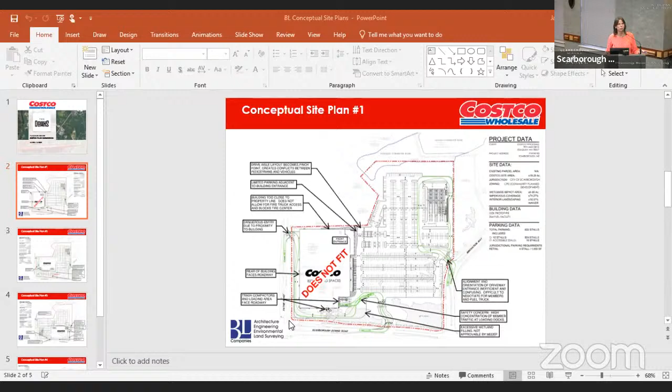So if you could go to sketch plan 2. With this plan, we looked at, okay, can we turn the building, and how would that work if we still had it on the corner? One of the main problems with this layout was the entrance off of Scarborough Downs Road. We couldn't get a safe entrance. If you look at that entrance, it's right by the front of the building.

We have the front of the building labeled. Oh, did I just go to... I did that, trying to make it a little bigger for everyone. But now can you go back to sketch plan 2? Just trying to see if I'm paying attention.

So what this does is it eliminates where it says dangerous — the big red 'dangerous' at the bottom. That is not a good movement to have; that's right by the front of the door, where the majority of the traffic is coming in. This time the loading and the compactors are along Payne Road, which isn't very aesthetically pleasing. And we don't have a good enough parking field by the entrance — we like to have a circle of parking with a lot of parking around the entrance.

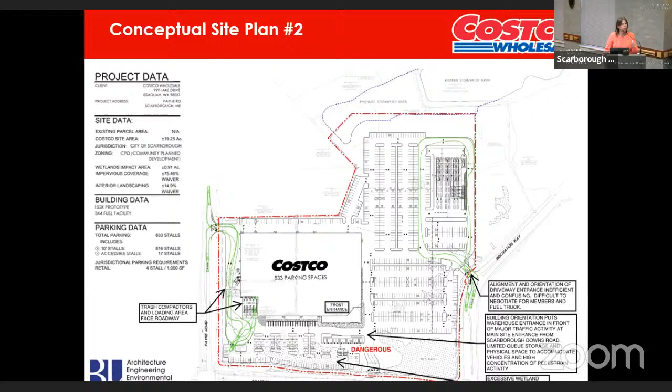And here we have even more wetlands fill — just under an acre of wetlands fill along Scarborough Downs Road. So we're basically eliminating that front parking field, that wooded area right now in the wetland system. This would be very hard to get approved by Maine DEP and the Corps. This one also had plenty of parking spaces, but it didn't yet meet the interior landscaping requirement.

So then we went on to a third sketch. What would it look like if we repositioned the building? We're kind of working around the site — if we move it further over onto Scarborough Downs Road and Innovation Way. Here, the main entrance on Scarborough Downs Road is not in the same spot as that existing curb cut. This would have to be a right-in, right-out access, which wouldn't be safe from a traffic standpoint.

And also, we are now filling in 1.5 acres of wetlands, and we've basically eliminated that whole buffer along Scarborough Downs. The loading area up on the page, right off of Innovation Way, is in conflict with the only full-access driveway on this plan — so there would be potentially truck movements there along with full-access cars coming in. And the gas station is on the hard corner, which we didn't think was aesthetically pleasing in an ideal situation.

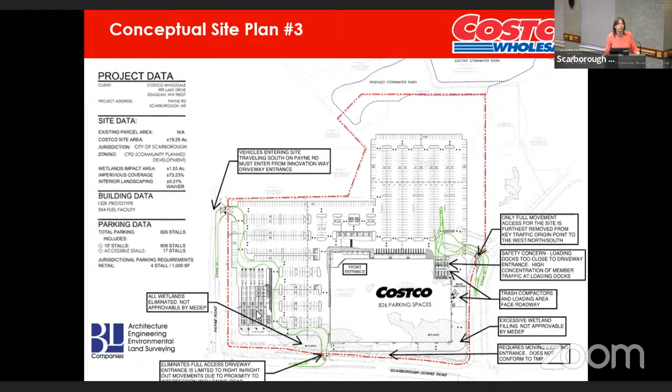Now we can go to the fourth plan. We said, well, what if we turn the building and tuck it up further along Innovation Way? This is the least invasive with the wetlands fill, and we hold the access point that's there. This provides a nice buffer, a treed buffer along Innovation Way.

We've moved the gas station up along Payne. This gives us the most queuing space for the gas station, and we're also allowed a 22-foot buffer in front of the gas station along Payne Road. We have more of a buffer in that area for screening, and all the loading is hidden and covered in the back.

Access for trucks is clean and easy. They come in off of Innovation Way and go right around the back of the building. There's less conflict with the members coming in and out of the site. This just seemed to fit the best and make the most sense.

We preserve the most wetlands and meet the interior landscaping requirement. That's how we got from the building against Payne Road to where the building is now. There were probably about 22 plans of different tweaks and iterations of these basic concepts, but these were the 4 basic concepts we looked at.

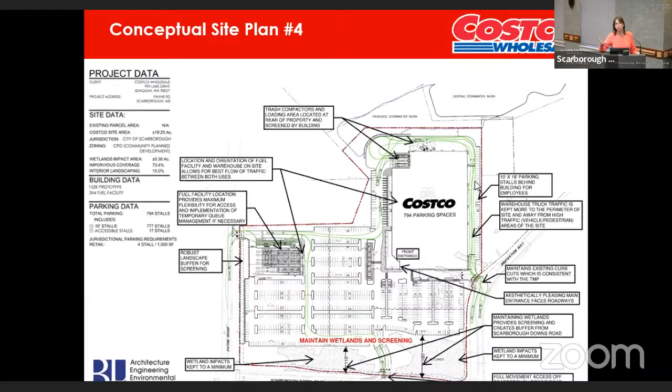I'd also like to note that on concept plan 4, we made the parking spaces behind the building 10 feet wide by 18 feet deep, since these would be more for employees and less likely to be used by customers. So we decreased the depth by 2 feet.

Do you have any questions about the methodology? Would you like me to have Chris come up now and walk through the number of parking spaces? Let's finish up with your presentation and then public comment, and then you can stand back up and the board will ask questions. I think that works best.

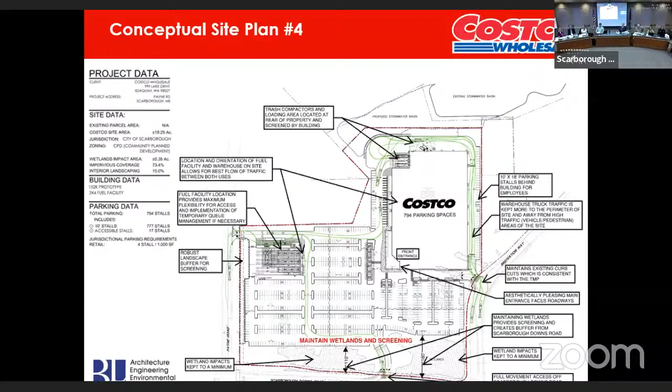Good evening, everybody. Chris Teasler with Kittelson and Associates, the applicant's traffic engineer. So you've obviously received the memo. I believe it's in your packet, which we prepared after working with staff to identify a little bit more documentation and information regarding parking for this site.

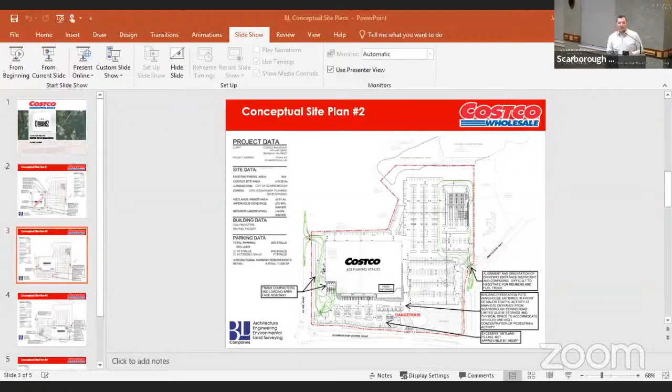I'll give a quick high-level overview of the 2 main points. The first was looking at the number of parking spaces and what Costco is typically trying to achieve, and what we've seen for sites in similar markets, similar sizes, and similar building sizes as it compares to what the town code would otherwise stipulate.

As we looked at those similar scale locations, what we're seeking here with the 794 stalls is basically a parking ratio of 4.93 per 1,000 square feet. That turns out to be right in the middle of the average of what we've seen at 10 or 12 other locations we pulled from our database. So certainly not the most intensively parked, and not the least, but that number is also important based on the market.

We want to make sure we have enough parking on this site to adequately serve Costco members and the anticipated demands we would see. Which brings me to the second point, looking at parking utilization for Costcos as a whole throughout an entire year, and the typical target ranges that both Costco looks for and industry best practice tells us to seek.

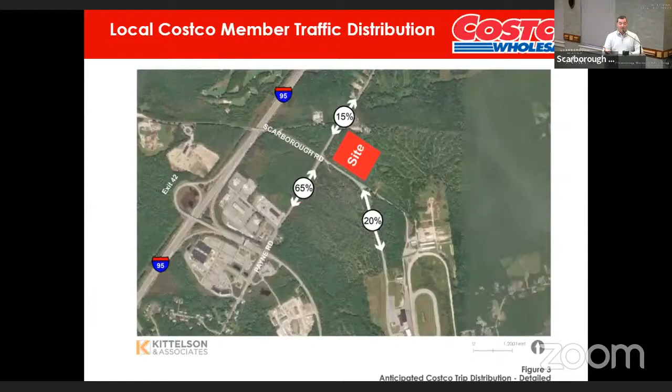I guess that's the other thing I can touch on, is the size of the parking spaces. Is that important? I knew there was one more thing. So when we think about the size, Costco does typically try to get 10-foot parking spaces wherever possible.

There's a few reasons for that. One is efficiency and safety and comfort for their members. Costco carts are actually much larger than your standard grocery store shopping cart. Obviously, they cater in bulk goods and larger items, so naturally those things are a little bit bigger.

Having more space between the vehicles allows members not only to get more out of the travel way and the drive aisles when they're loading their cars, potentially even getting the shopping cart completely out of the way. It also allows for those larger vehicles that people tend to bring to Costco, because they know they're going to be buying a more substantial amount of goods and merchandise, to load them up safely and effectively.

And the nature of the car that they choose to bring is oftentimes the larger one. Some people have a small car at home and then their big SUV or the family truckster. They bring the family truckster to Costco, not the smaller car typically. So that's really the impetus behind that.

As Michelle mentioned, there are several spots along the perimeter of the building where they have shrunk the size somewhat, again trying to be reactive and responsive to your code. And also thinking about where employees are most likely to park, away from the prime parking area where Costco members are most likely to park in proximity to the front door.

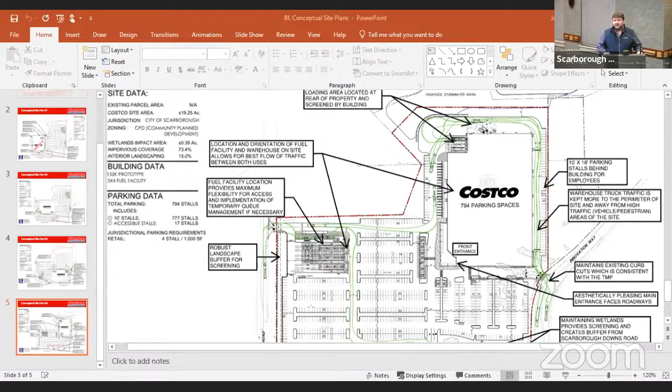So, which would you like me to go over first? Well...

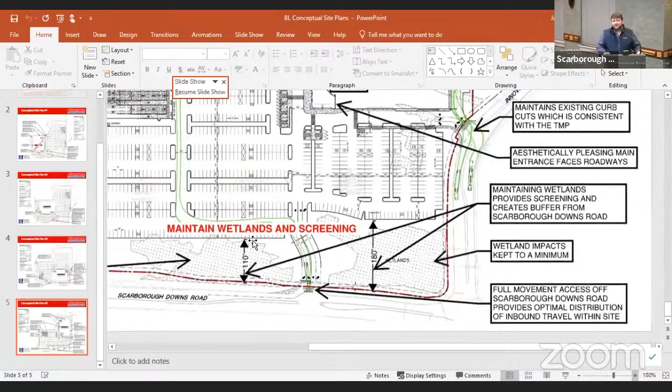I think if you could talk about the fueling, like I know you're queuing up a couple of lanes here. Can you pull it so you can see - yeah, right there, that's perfect. Nope, go up. So our canopy is actually further to the right in this site plan.

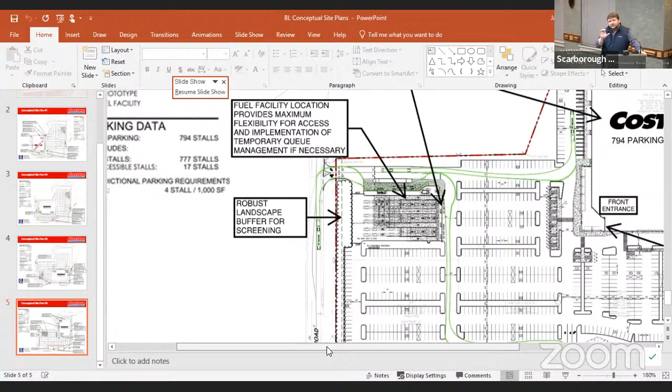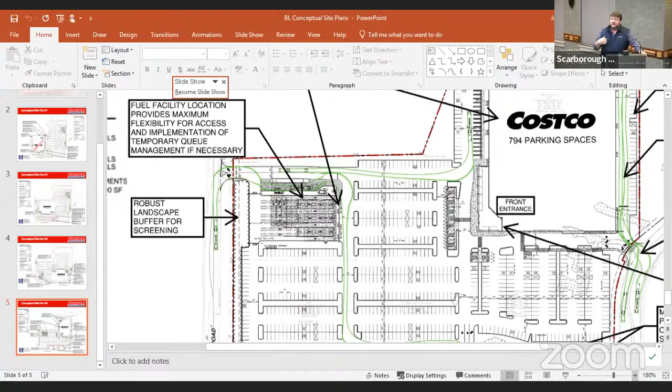We actually have an immense amount of data as to how our gas stations work. The Sam's Club up here doesn't have as much queuing as we actually have here in this layout. And what you're talking about is a scenario where there's a situation that's happened and gas prices have gone through the roof, and now people are really trying to do that.

I wouldn't ever deny that we don't have traffic issues that have evolved over the years. We've gone through situations where we've had traffic blocking, but that's what's caused us to evolve and figure out in extreme detail how these all work.

So several things are key. One is we're single direction, so that way people can't just sort of free go in different directions. We have a member that comes in and can guide people. The vehicles can fill from either side of the car - you can fill a big F-350 from the opposite side of the tank because we have longer hoses that accommodate both. So there's no issue as far as the vehicles we provide fuel for having the ability to fuel from either side.

As I mentioned in the last one, we have an average fill time of 3.5 to 4 minutes. It's much faster than the average gas station, so people really do figure out how to get in and get through.

So that creates a lot more - our gas station drive lanes are purposely wide enough to be safe, but then we also have a through lane between the pumps. So you have two cars that can load on either side filling up, and then you have a center lane so that allows anybody within it to actually get out very safely.

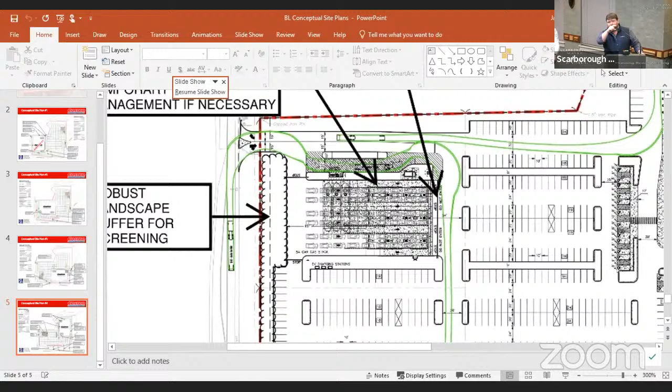I forget the exact data, but in this one we show 3 islands by 4 deep. If I was to add a 4th island, we'd increase our throughput by about 20%. And I can tell you in places in California where we're extremely busy, we're doing 5 by 5s now - they're much larger and putting through a lot more people.

But separate from that, let's say we are in a situation where the gas station is full - we just got people coming in and it's backed up. So what we do is we have a plan for that. That entrance down at the bottom gets shut off because we don't want people backing up and blocking that entrance and then backing onto Payne Road.

What they would end up doing is coming in - we have several different layouts that we would work out, and we typically do this when we get our warehouse manager selected. We have options for them to come into the parking lot and be able to stage within the parking lot. But when we're doing that, we're really staging a lot of people, and that does not happen on a regular basis if we've planned for it.

So what you're seeing when you go out recently - I can actually attest to the fact that our gas stations around the country, around here and in Canada, are all busier because of the current situation. And like you said before, we shouldn't necessarily be designing for the absolute worst case, the Wednesday before Thanksgiving kind of situation. So I can appreciate that.

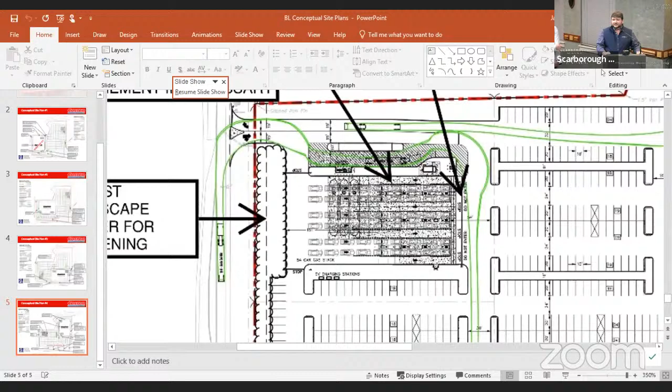I'm actually the one that asked about the parking utilization. I appreciate you providing that information. It's the first time I recall being on the board where we've received information like that from any applicant, so I may be mistaken.

Regarding, just to piggyback on the fuel thing, I just wanted clarification — you basically will have people coming in off of Payne Road, right? For the fuel station, they can access it from either side. They can come in off Payne Road or from the parking lot. But if they're just coming for fuel, most likely it's going to come off Payne Road.

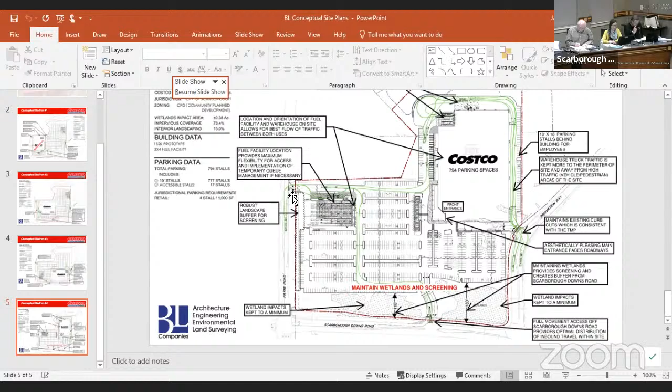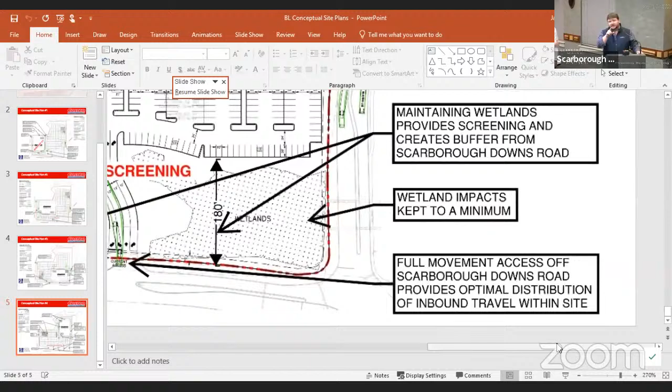Yeah, so they would come off and make a sharp right there. How many fuel stations do you have in each of those 3 aisles, do you know offhand? It's 4 deep, and there's one on either side. So it's a 4x3 layout. And is there enough width between those so that if a car is behind another one getting fueled up, they can pull out? Correct, yeah.

Based on normal circumstances — and I understand what we're going through now is kind of unique, you can't plan your business based on what's not normal — based on your experience with your other facilities, will this be adequate queuing? Yes, it's actually a little bit more than some of our other locations.

So what happens when cars come in off of Payne Road, take a sharp right, and all of a sudden there's a car there? Our attendants are going to be paying attention to that. So if, for example, that top lane starts to back up and the others are not, they're going to direct people to get into the further ones to fill up all the different lanes. If all those lanes start to fill up and you get queuing, they're going to pull out the cones, block that off, and direct people to go down through the parking lot instead. Exactly.

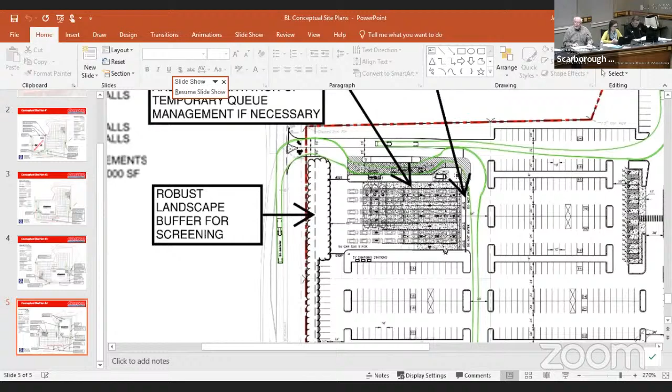Regarding the sketches on the siting of the building, I'm comfortable with where you have it, your preferred place, because this is a very high profile location, and there's going to be a lot of parking — you can't get around it, it requires a lot of parking. I think it's really incumbent upon you folks to have some nice landscaping around the parking, even within the parking, the islands and things like that. I think that would be very important.

I wanted to ask about the typical drive aisle widths at your other locations. What are they typically? 25. Are they 25? Why are you going to 24 instead of 25? We call them our development guidelines — we go with either one. It gives us a little bit of flexibility to deal with items that come up, such as the parking depths. So if I can reduce the drive aisle by 1 foot, then I can keep the 10 by 20 parking space.

Okay, I actually understand your rationale for the space between the vehicle parking spaces and the oversized parking spaces. I think it's kind of interesting, the comments about other big box stores going with a similar arrangement. And I think our standards are probably based on... have our standards changed to accommodate these big box stores like this?

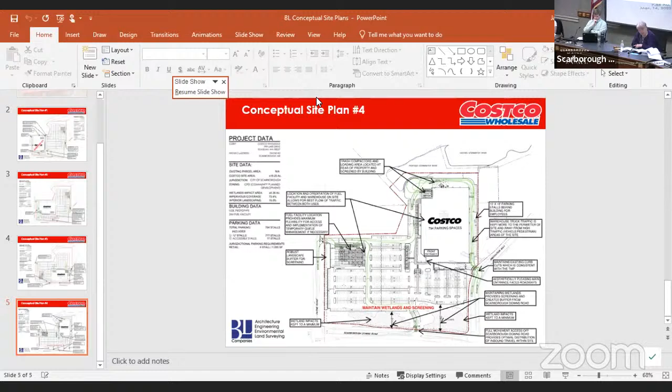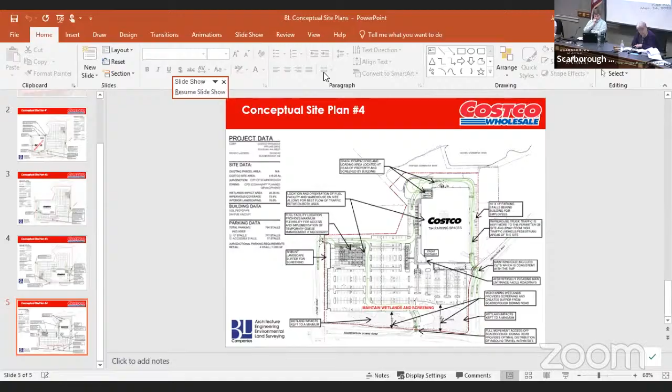If you've got the gas station in front, we need to see robust landscaping. Given the amount of parking that you have lined up in front of Payne Road, if that's going to stay there, we need to see robust landscaping.

You don't hear the complaints and concerns from Scarborough residents about parking lots that are just loaded with asphalt. You don't get those phone calls. Jay gets them, Eric gets them. I hear them from folks on the street. And we do pay attention to that. We do pay attention to how a business looks in Scarborough, and how it looks affects how it is received by the people of Scarborough.

You could end up putting a building in there that everybody complains about, and that hurts your reputation. So please work with the staff, please work with us in terms of getting a site plan that really meets the needs of Scarborough and meets the needs of Costco. I think it's possible, but I think there are going to have to be some very tough discussions with the planning staff. I appreciate the work all of you have done in bringing this to us, and I do look forward to getting a membership in Costco again, and to welcoming you. Thank you very much for your time.

Could I just make a comment? I'm a little troubled because I didn't get a sense that there's a real problem with parking that you expressed. I think it's very important that the public get a sense of where we stand, because Jen and I did differ a little bit, but I didn't get a sense that there's a big problem with this. So I don't know how you want to handle this, but I don't like it being left hanging out there like that. I was expressing my opinion, Roger.

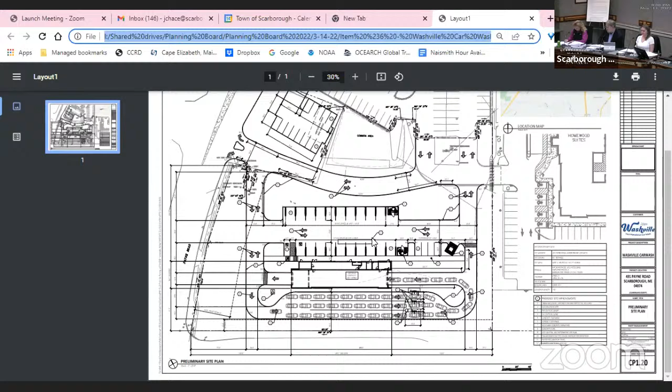Yeah, very similar thoughts here. I'm certainly concerned with the Payne Road approach. Also, what are the hours of operation here? We would be operating from 7:30 to 7:30 generally, and on Sundays 8 to 5. I'm just noticing the nighttime renderings and curious there. All of our lighting would be dark sky compliant, naturally, it's just how we design our building. Also curious about signage and wayfinding on the site here. So, cool with that.

Let me talk about Payne Road, understanding how people work. Once there's that entrance or opportunity to enter, that's where folks are going to enter to get to Sebago Brewing, who are coming from Payne Road. They're not going to go up to Southborough Road and turn, they're going to take that opportunity. So the traffic we'd see going into that site from Payne Road heading north would be, I think, reasonably a fair amount more than just people coming to the car wash. In the standards, we indicate that where there are two possible entrances to a site, the entrance should be on the road with the least amount of traffic.

That's Southborough Road, which is already signalized, so I don't see the need for the Payne Road access. I understand why folks might want it, but we have a perfectly good entrance and exit out to signalized traffic on a road that can handle the extra traffic from this site. If there is no entrance or exit off of Payne Road, then there's no need for that amount of space to be used for a passageway, which would allow room for the car wash to be built parallel to Payne Road rather than at 90 degrees. That would also allow the opportunity, I suspect, for the option for the vacuum areas to be in the back of the building.

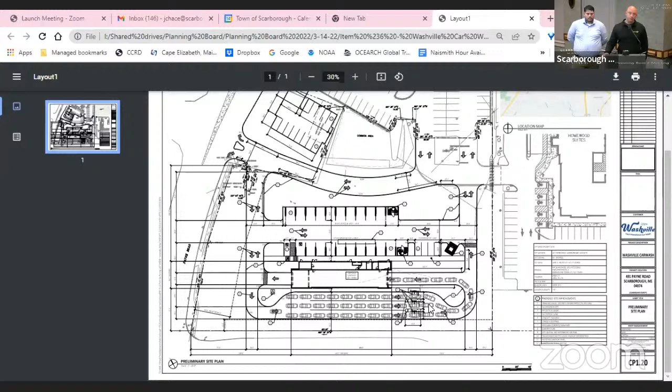Certainly when you do a regular site plan, that sort of information is very helpful. As we look at that, knowing what steps you're taking to mitigate some questions or issues we have, if technology is the answer, give us the technology. Understood, and that's very helpful to us.

Nobody has brought up yet the question of the architecture. We've talked about the garage door facing the street, which is not recommended certainly in the design standards, but nobody has talked about the actual view of the building.

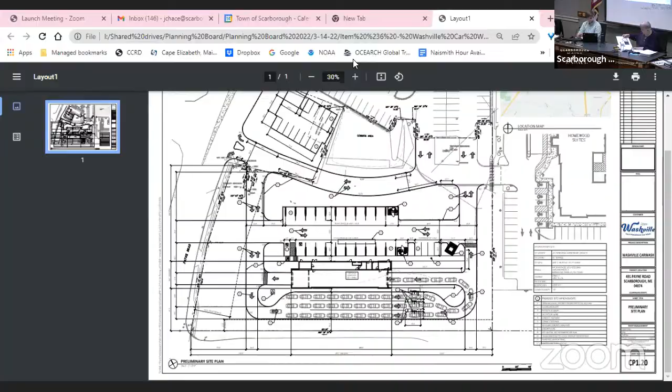And as I look at it, what I am not clear that I see is a relationship between that building and the building next to it, to Sebago, let's say, or La-Z-Boy, because it's all of a sudden it's a new building in between two others, and it has very distinct architecture all on its own.

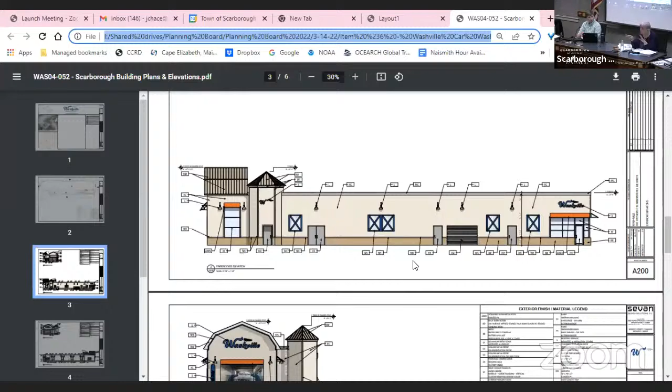And we do like to pay attention to the abutters and the relationship of a new building to the abutters in terms of the architecture. So I really would urge you to take a look at the other buildings that would be next to it and consider what you can do to kind of harmonize this new building with what's there.

Keep in mind the New England vernacular as you go along and the design standards that we have. We do have commercial design standards. Double check those.

I don't recall seeing essentially a sort of a barn visual coming to us before, so I'm not sure how I feel about it. It's something that's kind of different.

We build all over New England and in Long Island, and one of my comments back to that is almost every town in New England does have a barn. So the gambrel roof is an extremely popular roofline structure. The silo structure is something we try to do to mitigate on height, but also set the building apart, and it's part of our brand.

To be quite honest with the board, this is our brand. We won't mitigate or change our brand to meet design standards. We feel that they fall within line.

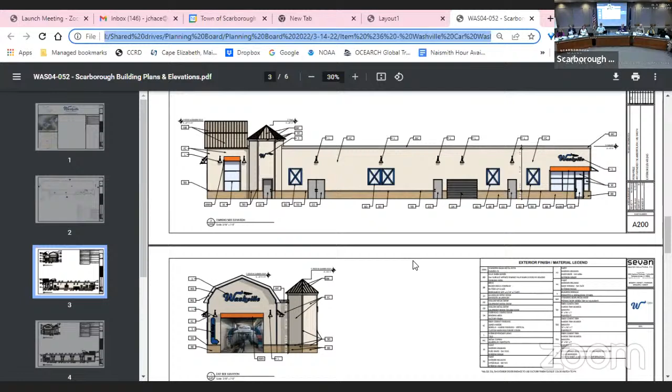Next on the agenda, Mayetta Construction requests a final land reclamation review for a wetland restoration project as part of an approved EPA mitigation plan at 150 Pleasant Hill Road, assessors map R078, lot 50A.

Eric: Mayetta Construction is requesting a final land reclamation review for site work in accordance with a Maine DEP and EPA approved work plan. This would consist of restoration and stabilization measures for 4 wetland areas on the property. Work outside of these areas would involve fill removal, grading, and installation of stormwater facilities. No further development is proposed on site at this time.

At the preliminary review meeting in January, the applicant was asked to provide further stormwater information and zoning detail on the site plan, which has been clarified. With that in mind, staff has prepared a draft motion for the planning board's review. I'll turn it back to you, Madam Chair.

Thank you. And for the applicant. Good evening, I'm Amy Bell Siegel from Sebago Technics, here with Vinny Mayetta from Mayetta Construction.

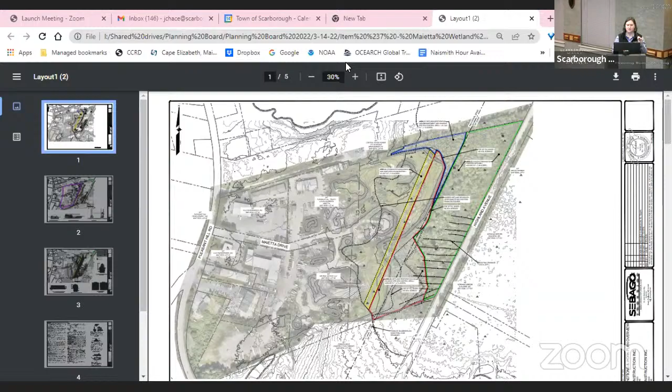Thank you. This item is subject to public comment. Is there anybody in the room who's going to charge forward with a public comment? Jay, is there anyone online?

We have a few folks online, 4 folks. I will start a countdown to give them a few seconds to raise their hand.

And none have raised their hand. All right, in that case, the public comment period is over. I will turn this over to the board in general.

Hearing none, I have a draft motion. I move to approve the project titled Mayetta Wetland Restoration and Planting proposed by Mayetta Construction as depicted on the plan set prepared by Sebago Technics dated 2/28/22, with the following findings and conditions. Findings: the proposed project takes corrective measures for unpermitted activity on the site. These measures include restoration and stabilization within several project areas as part of a consent decree with Maine DEP and the EPA. Work outside of these 4 areas will consist of fill removal, grading, and the installation of a wet pond stormwater BMP. No further development is proposed on the site at this time. Waivers, number 1, permit the appropriately stabilized steep slopes on site to be greater than a 2-to-1 ratio as authorized by state and federal agencies.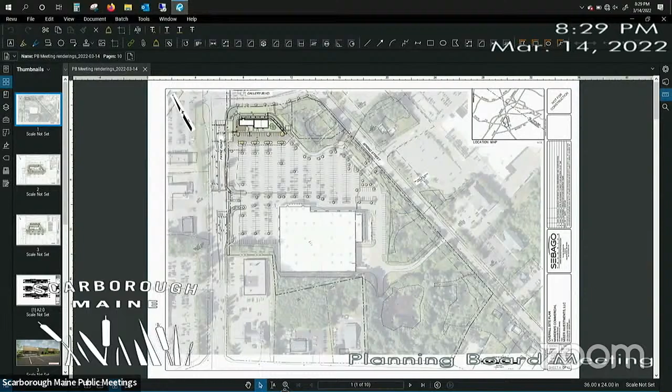As Eric briefly stated, the proposed project will be about a 5,000 square foot building with 3 tenant spaces, one of which for a drive-through coffee shop, located on the corner of Gallery Boulevard and Payne Road in Scarborough. It's located on the northern side of the parking lot, near that intersection of Gallery and Payne Road. It's currently accessed from two locations, one at Spring Street and one along Payne Road there, the Martin's entrance. Payne Road of which is signalized currently.

There are sidewalk connections, if I could zoom in here. Sidewalk connections proposed as part of the site plan application along Gallery Boulevard, as well as a connection to Payne Road for pedestrian access from either direction there.

Currently today, you know the site as that large open and underutilized corner of the parking lot. The project itself is taking that parking lot and proposing about a 13,000 square foot reduction in the impervious surfaces in this corner of the parking lot. And those reductions come in the form of landscaping for the building, larger landscape islands towards the end of the parking lot, as well as an enhanced planting screen along Gallery Boulevard.

The screen certainly will be designed to include year-round 4 seasons of interest, provide some buffering to the building itself, as well as the aesthetic value.

The project is currently proposing this building along the edges, as close as feasible to the setbacks at the corners along Gallery Boulevard and Payne Road. The goal is to use the building to minimize the visual impacts of the parking lot. As part of the commercial design standards, we're trying to get that building close to that corner, while still allowing for access lanes and drive-through lanes around the building.

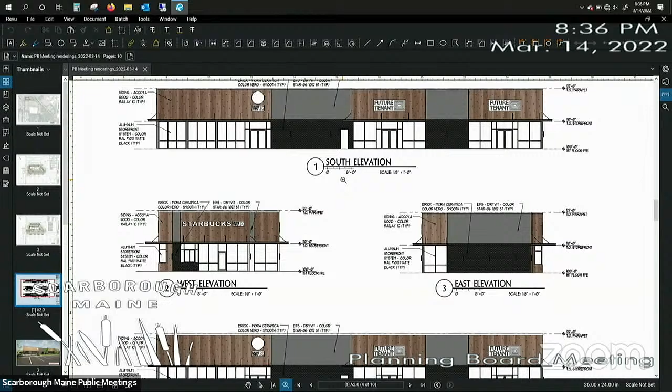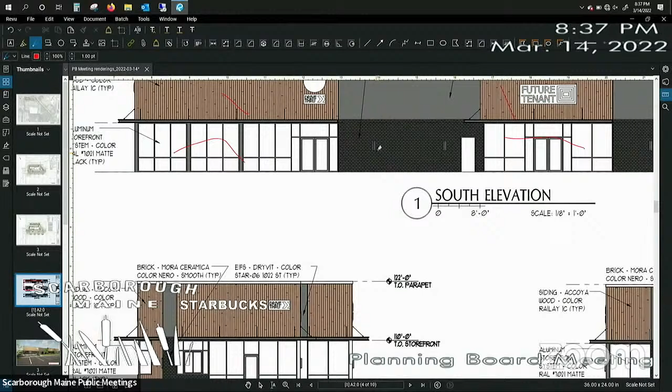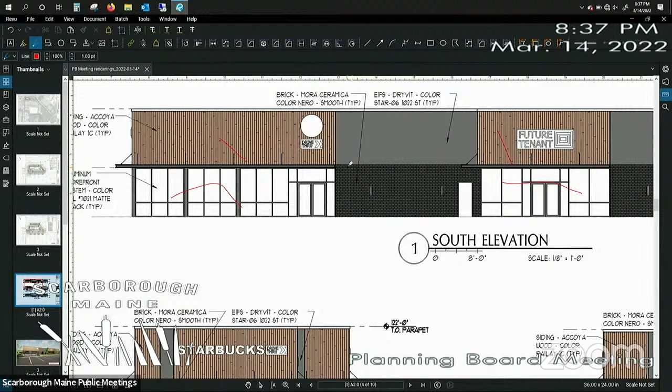Currently, the proposal is to have wood siding on top, with the majority of the entrance areas to each space in glass, and the top in wood. The bottom half is currently proposed to be brick that is painted black. The top portion is an engineered synthetic smooth finish stucco that's been used in multiple locations, which they're currently looking to use—a smooth finish as opposed to rough. So you have brick, then a smooth exterior wall adjacent to the wood trim and the glass windows.

If I could go through a couple of the architectural renderings of the site—I'll note these renderings are representative of the current building, but not necessarily the current site layout. You'll see some inconsistencies, like no landscaping shown in some areas where the landscape plan does show landscaping.

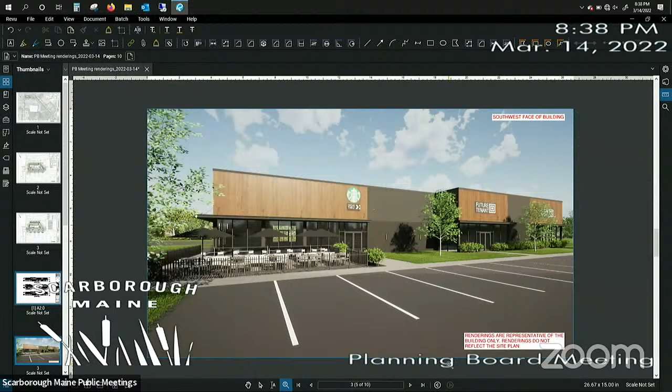Here we're facing the southwest face of the building, the entrance to the drive-through coffee shop with the patio, and to the right, the potential future tenant spaces. Here's the southeast face of the building, you're seeing the other side of the front, showing the interior of the parking lot.

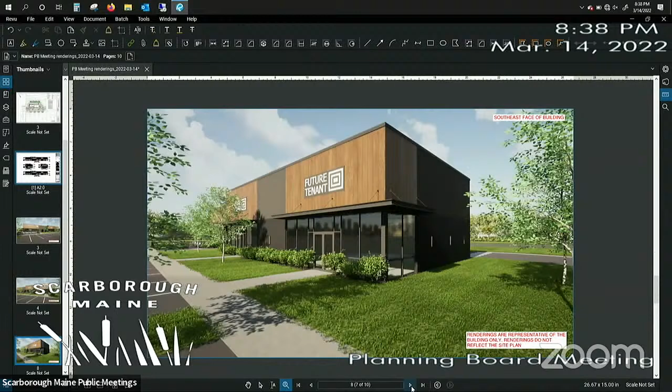As we round the corner, to the right is the drive-through queuing lane. On the back side of the building you can again see the wood trim, brick lower half, and smooth finish at the top, with the drive-through window at the very end. Here we're wrapping the northwest face of the building.

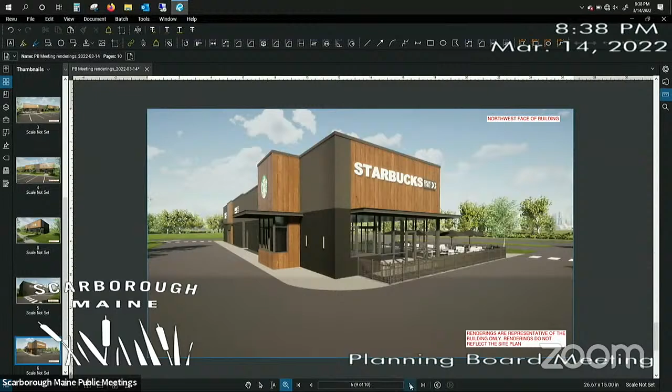You'll see the drive-through window and the walk-up window for pedestrians connected to that patio. Here's a better view, with the walk-up window to the far left of that face of the building, an access door, and a patio with seating, umbrellas, and other items for pedestrians to sit.

So that's a brief walkthrough of some of the renderings of the building. I did note in the comments that it looks like an existing conditions plan didn't make it into your packets. We'll make sure that's included with any response to comments, as I believe that should help clarify some of the other comments listed from staff.

We'll be coming forth with the fire department turning radius and vehicular movements to make sure a fire truck can make the movements around the building and circulate through the parking lot. I believe we've covered a majority of the comments. We'll be providing a little more information on snow storage and fencing with the coming response to comments. With that, I can turn my presentation over to the board for comment and follow-up. Thank you.

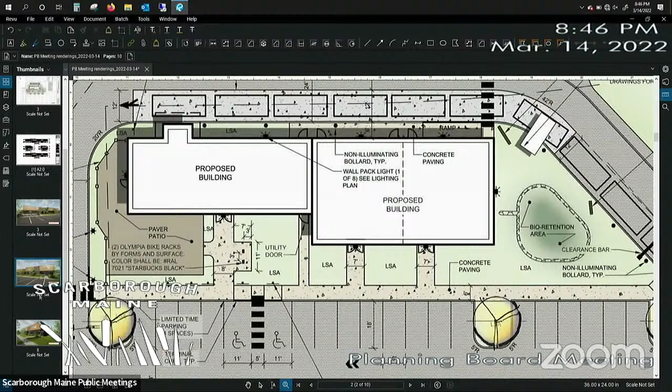There is a photometric plan that was provided as part of the application. Briefly, on the site plan, the building is proposed to be lit with wall packs. I can show you a bit more of a visual of that in the rendering, certainly not from that close up.

Is there coverage for the patio area? Yes, there will be lighting coverage for the patio area, and there will be some ambient light coming off the interior itself. There's also an alternative where there may be some sort of hanging patio style lighting, string lighting.

That's all the questions I have. Thank you. Karen? I don't really have any questions. I feel like they've addressed some of the concerns we have. At this point some of the issues we're dealing with are rather minor. I think no situation will ever be exactly perfect, and I think they've done a really good job using a space that's just sitting there blank, trying to make the best use of it.

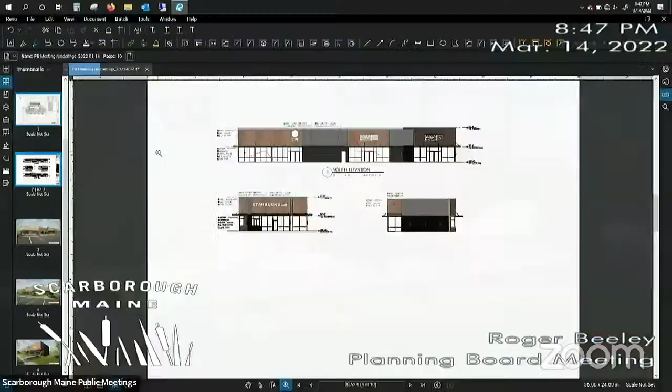Thank you. Roger? First, I wanted to say I think the building looks terrific. It'll be the most attractive building in the whole area right there, I think. Can you go to the screen that shows the side of the building? The side on Gallery Boulevard—not that, the backside—because I think that really looks attractive.

Now, is there anything you can do about that though? Because that looks like one big blank wall. That's a great question. We can certainly look into what that may be, but at the moment I don't know how much can be changed. We can certainly look into breaking it up between the all-black or charcoal, whatever it is, just two different color schemes or something.

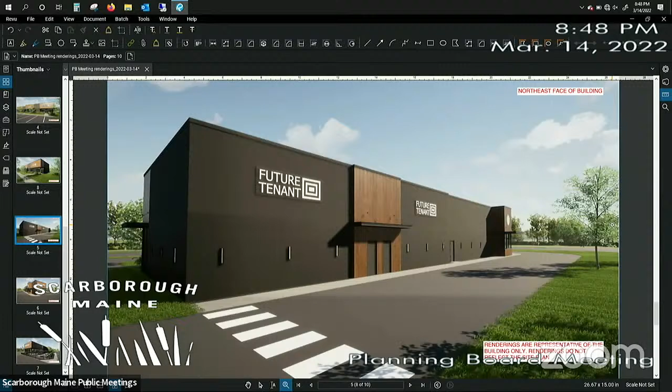I don't have a problem with the drive-through right there. It is what it is, that's where it's got to be. So I think if you could do something, because that's what some people are going to be seeing, that's how most will likely go. As you're talking about the drive-through, I'm amazed at how many people queue up to get a cup of coffee in this town. Being right there, they can decide whether they want to come in or not by looking at that.

But I think the building looks really nice. I want to go back to something at the previous meeting. I thought we had a discussion about that closest access point on Spring Street, and didn't we decide to discourage that? Do you recall? That was a staff comment at the sketch level review.

It really wasn't brought forward during the site plan comments. I didn't really get a sense that staff got a sense that it was something the applicant wanted to pursue, or the board was thinking of requiring. But that was something in our previous comments, and certainly if the board wants to see that, they should have that conversation with the applicant.

Because the one that's further down on Spring Street, that's the one that goes into where Walmart is, is that correct? Yeah, I believe so, the northerly most entrance that was previously discussed. Right, it's a right in, right out, and there's often a lot of vehicles that turn left out of there. Didn't we have that discussion about that? You're probably anxious to jump all over that. So I'll leave that alone then.

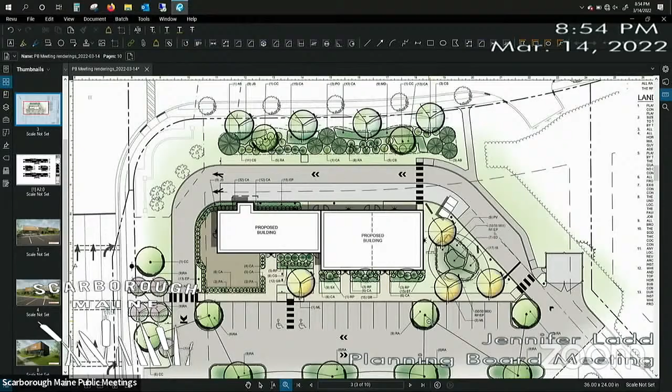Did we see this as part of, was there a larger plan for the site at some point, or am I imagining that? Yeah, at sketch plan we had looked at, or I believe we had shown kind of a larger, what would potentially be future development along the Payne Road side. Okay, is there still a desire or effort happening to move towards that at some point? Certainly, yeah, I know that's still something the applicant and Miser Investments would like to do in the future.

I appreciated the look at the master plan because I think it helps tie this together with the other activity already happening on the site. And I liked some of the changes you were proposing in terms of modifications to the entrance out at the signal on Payne Road. I can't remember if that concept plan included it, but I'd throw out that it would be great to have some sort of pedestrian connection between this new building and the existing building. It probably need not be at every row, but at some point, an option for people to park once and do two things if they wanted.

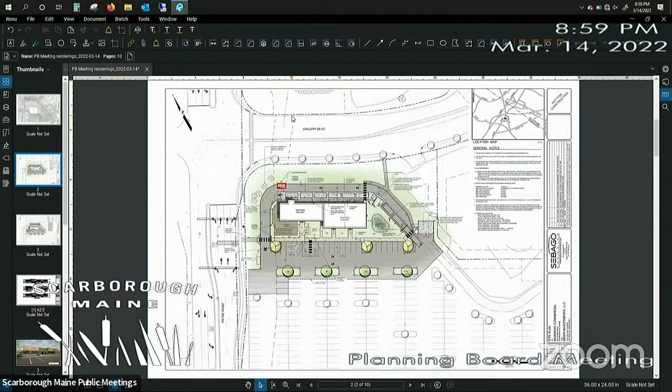When we draw that in what's called a pipe network, I was looking at it after I saw the comment. It does look like it's a proposed pipe. That's certainly just how the line work showed up, and we'll look to show that more as an existing pipe as we can. As a CAD user, I can sympathize with that. Thank you for the comment.

I was just curious how much of Gallery Boulevard you were going to be paving or not paving. So that answers that question. The intent is to try not to impact Gallery Boulevard. Okay, great. And then, let's see, ped connection.

Yeah, I think that's that. Roger brought up the right in, right out on Spring Street, which I do also remember talking about at the last meeting, probably as part of that larger site plan conversation. I see this from both sides. As an applicant, you are arguably not making any other changes at that location. As a planning board member, and in defense of our standards and ordinances, my understanding is that any project like this opens the entire site up to conversation about access management and things like that.

And I guess I would say, if this access, with the addition of these new uses in this corner, continues to present any additional safety concerns or confusion within the parking lot, it's definitely something that I would be looking to see remedied in a future build-out phase of that larger master plan.

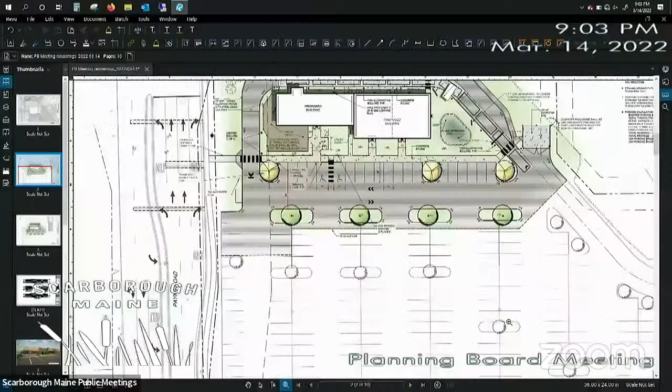Let me see if I can back out a little bit here. They're not actually in the islands per se. The existing light, I can highlight it here for you. The existing light on that side of the parking is right there currently. Yeah, that's probably going to be too far. You can see where your mouse is right now, that's really dark, right up here.

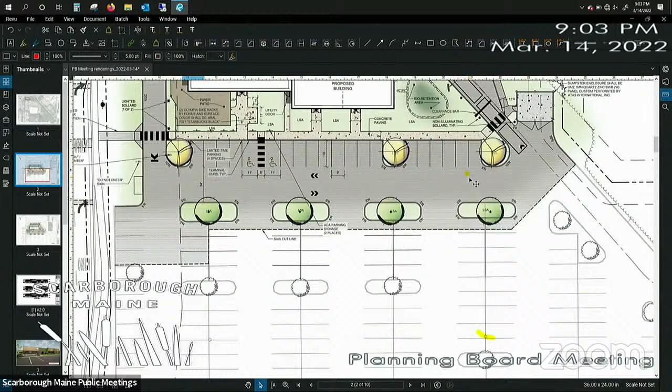That area probably needs maybe a bollard or something like that, that can at least take care of some of that depth perception. I'm just wondering, even in your drive aisle, if you've got people walking across into the bigger parking lot, I'm not worried about abutters in this case, and we don't need full cutoff, but there's nothing there. So I'd like to see what might be done, whether it means you're going to have to put some pole light in those islands to take care of that. That might be necessary.

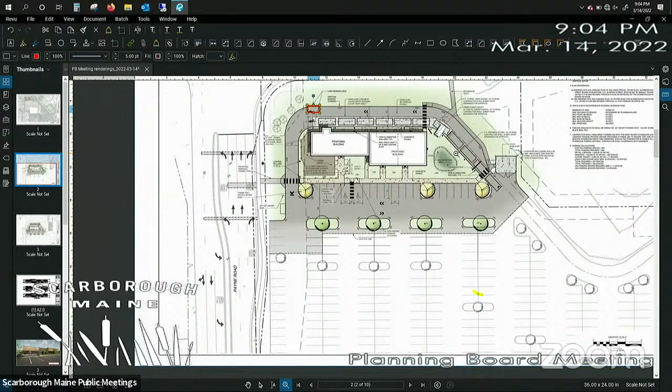I don't like to add a lot of lights, but I also don't want people run over because nobody can see them. Certainly, we'll evaluate that photometric and take a look, and if we find a dark spot there, we'll illuminate it and make that photometric a little bit more balanced. That'd be great, we'll consider that. That's all I have, everything else has been covered.

I have the staff noted a question around the flat roof line and whether they're going to be roof mounted hood systems or HVAC systems. Any HVAC systems that get mounted on the roof shall be screened, and we'll certainly provide any sort of information with any response to comments for you guys. All right, yeah, if you can show how that's going to work, I appreciate that. Certainly.

I've got another question. The walkway off of Gallery Boulevard leads up to two different crosswalks. One of the crosswalks just kind of ends at the building, and I assume it's there for folks to come out the rear doors. But I would suspect that people coming up from walking along Gallery Boulevard will also do that so they can walk around the building to Starbucks. So I think you're going to need to put in a walkway, something that connects that crosswalk to the front of the property.

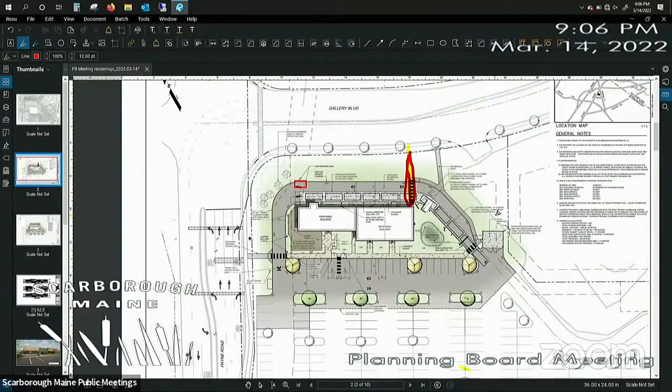If people are coming, the crosswalk and sidewalk are there primarily for the buildings, but people are going to use that to get around to the front. We don't want them deciding to walk down the back along the sidewalk, coming to the ordering area and saying oops, then trying to walk around it. So I think that connection would be important.

I had a question about the patio. Actually, the note was benches, but I think you've explained that they're going to be tables there. Are they going to be year round or removed in the winter? I believe they'll be movable, so they'll have the option to move them around. I can't speak to whether they're going to be pulled in the middle of winter or left out, but I believe they are movable.

I would suggest that it's important to have at least a couple of benches year round. If you've got the tables, that substitutes for the benches, but if they're going to be pulled aside, it would be helpful to have a seating area, a bench by the door, by the Starbucks door. That would be helpful - I recall the discussion we had last time.

Mr. Beely had a question about deliveries - where are the trucks going to be delivering materials and supplies to? Trucks will be delivering materials and supplies around the rear at off hours. So they're not going to be interfering with cars zipping around to get to the window? Correct.

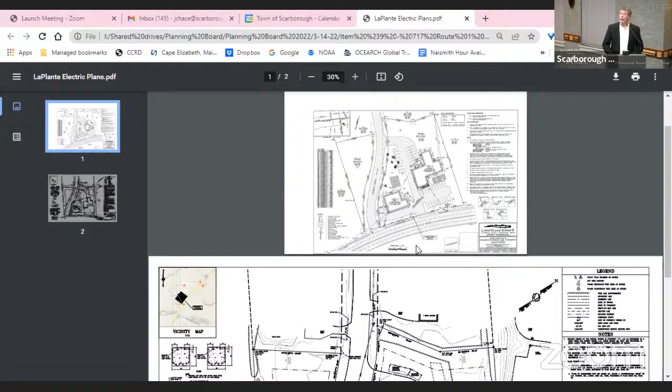I'll show the parking on that area. In the meantime, as soon as the weather changes a little and the ground becomes less frozen, that area will be revegetated. It's completely vegetated now, but it's been chewed up a little because of the parking that was there. Those vehicles are now off-site, and we'll be dealing with that again shortly when we come back to the board.

Staff came up with a couple of comments regarding the areas proposed to be in the back of the building, which would be small outdoor storage areas. Those storage areas right now are actually on the southerly side of the building, adjacent to Queens Drive. We're proposing to make those in the back of the building.

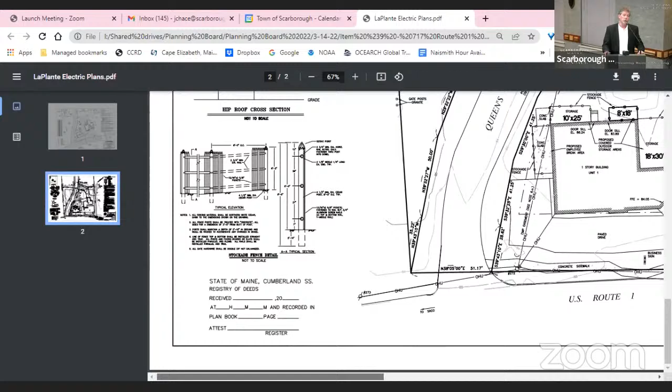The pad areas, the concrete pad areas that are fenced, and one open pad on the southerly side adjacent to the building by Queens Drive, those will be removed completely, and those areas will be revegetated. We will also do some plantings in there according to typically the municipal planting schedules for that area.

That will basically camouflage that area of the building a little bit. We are talking about the back of the building here, not the Route 1 frontage. But we will be having some plantings along there just to soften it a little for people coming down Queens Drive when they look at the back of the structure. So that's as far as the landscaping is concerned.

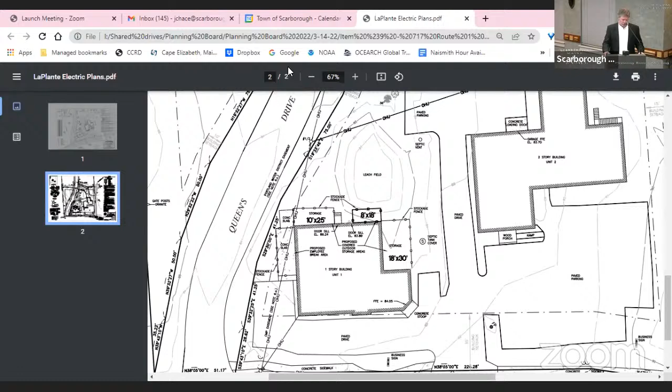The dumpster, there's currently a dumpster at the very back end of the parking area. We're proposing that the 2 dumpsters LaPlante had put immediately adjacent to Queens Drive, where these 2 pads are now and about to be eliminated, will go back where the dumpster is now. It'll be a larger dumpster area, one for recycling, one for solid waste.

We're actually proposing, what you see in your plans, to mirror that. There's an existing dumpster area on the right-hand side as you're looking at it. We are proposing to put the 2 other dumpsters on the left. These are fully enclosed; we're just going to flip that over to the right side of the existing dumpster.

Primarily because there has been a request by the other condominium owner, the furniture store. Upon occasion they get some fairly large tractor trailers that come in with furniture for them, and they back into the back of that building. They mentioned they might have a little more of a challenge trying to go back out when they leave.

They go back out into Queens Drive and then come back out to Route 1, making that turning radii. Both the access drive and Queens Drive are 24 feet wide. So that's more of a driver problem than a vehicular radii problem, but we'll make sure there's enough room on site in case they need a wider arc. That's why we'll flip those dumpsters to the other side.

As far as storage access is concerned, the smaller slab at the easterly corner will also be removed. It's not fenced in currently, but it will be removed. And there was a request by staff to show on this new plan the actual striped parking spaces that would be applicable for both units.

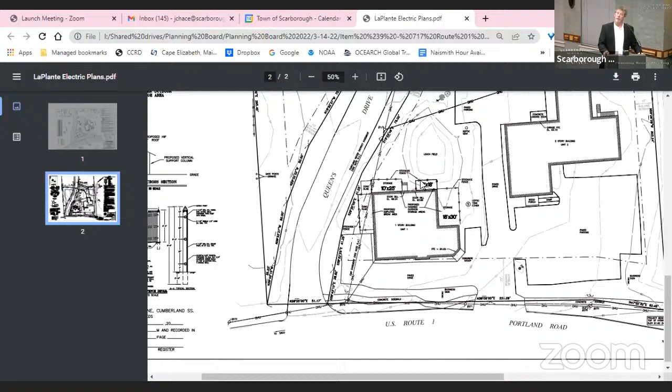This item is subject to public comment. Is there anyone in the room who would like to make a comment?

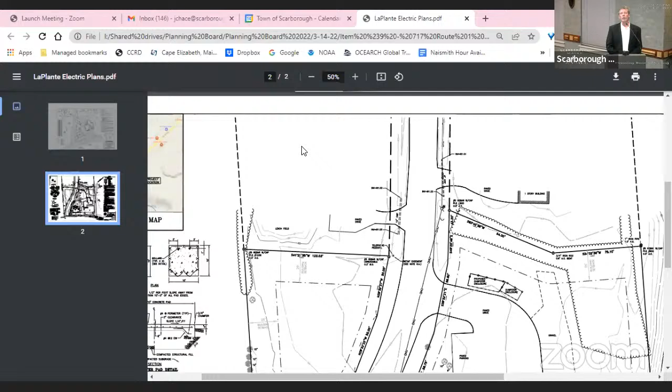There's a dumpster pad currently at the back end of the parking lot. We're going to be adding a double dumpster fenced-in area to that, one for recycling and one for solid waste. So right now you'll see where the dumpster area is. We're proposing the dumpster area to the left.

We're still proposing it, but we're going to mirror that. We're going to flip it, basically exactly right where the cursor is pointing right now. If you can see the screen, as I understand it, this larger rectangle area is what is currently proposed, and that is being proposed to now be flipped, based on the comments, over to this side.

Okay, all right. And then just to further clarify, as I understand it, these are the areas to be removed. That is correct. Yep. And these 1, 2, 3 are the outdoor covered storage areas that are being proposed.

That's correct. In essence, yes, there are a number of issues that need to be cleaned up at the site, but really the genesis or the basics of the application are about those three outdoor storage areas and the dumpster enclosure. And then there's a host of other things to clean up, understanding, but those are really the new things on site, so to speak.

And were those slabs created since the plan? Yes. Oh, they were, okay. Yes.

And just for my general information, this triangular spot, I know we're not dealing with that tonight, but do they do parking? You put parking over there too? So you own that property?

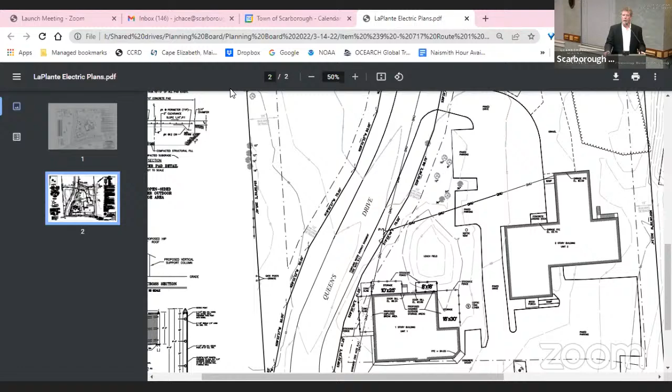Madam Chair, if I may, just a point of clarification on what Eric brought up. When we come back for the parking, it's a little more challenging than just putting in a parking area, because in this zone, parking needs to be covered. It doesn't need to be enclosed, but it needs a roof over it. So it's more challenging than just dumping gravel on the grass. That will be engineered in terms of stormwater management, with a structure over it. We're working with staff toward that end, and we'll have it before the board shortly.

Just at the danger of putting too fine a point on it, I want to be clear that covered parking is really required when we're talking about outdoor keeping of vehicles in excess of 24 hours. So for a regular parking area for retail, you don't have to cover it. What we're talking about in this application is the business has 15 vehicles, and those aren't customer vehicles—they could stay on site. Our ordinance says outdoor storage needs to be covered, and the definition of outdoor storage is keeping vehicles for more than 24 hours.

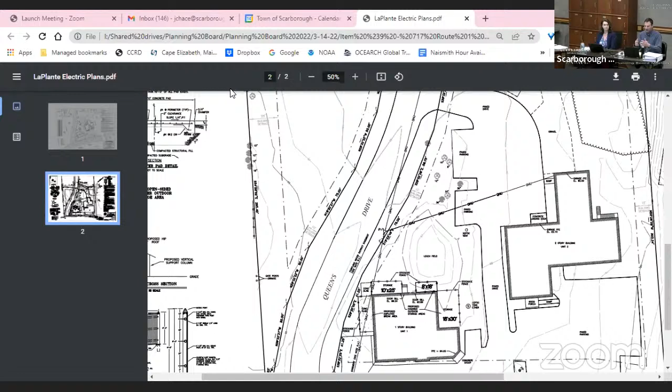At some point, one of these vehicles is going to stay there. And why I say at the danger of putting too fine a point on it, that's not what's being proposed tonight. That was part of the violation discussion our department has had. The wonderful thing about vehicle parking violations is they can be resolved simply by turning a key and driving away. So that problem we've attempted to address, and our department will continue to monitor. It's now the long-term items on site that are before the board tonight. I hope that provides some clarity.

Not entirely, but it's going to have to do. Any other comments from the board? I have one. Go ahead.

When you come back, can you give us a picture of what this covered storage you're proposing to put here looks like, maybe from Queens Drive? Sure, we can certainly do that. It's basically just a hip roof, to answer your question.

I'd like to see it in the back of that building and what you'll see coming in and out of Queens Drive, including the nice buffer and landscaping that would be there eventually. I'd like to see an elevation of the backside of that building with the covered storage you're proposing. We can do that.

That's all I have. And I second Rick's request. I'm looking at the plans, and I guess from my perspective, I don't have enough. I understand what you're asking, I think. Let me just run through it to make sure I've got it right.

You are proposing to remove the two concrete slabs that are actually encroaching on the easement. You are proposing to install three storage areas that are on slabs. Is that correct? They may be on slabs, they'll be covered, so it may just be a gravel base. Okay, but we don't know what the coverage is—we just know there's a notation that says a stockade fence.

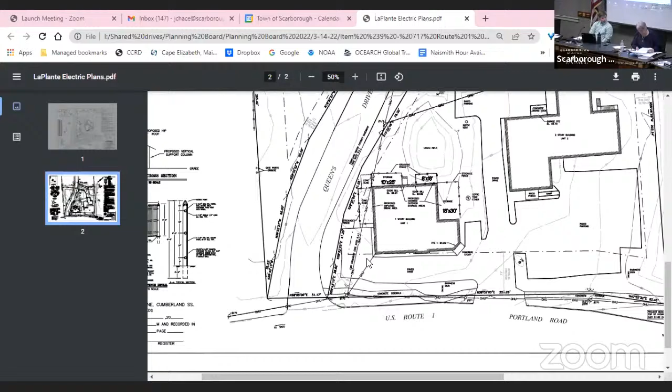Yeah, we see a hip roof cross section. Proposed vertical support column. That, I guess, doesn't do it for me in terms of a description.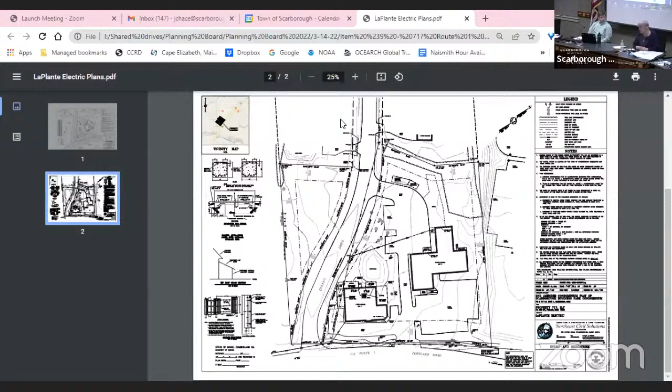In my opinion, this application, while it seems simple, is incomplete. Not enough for me to make a decision on, but I'll ask the board members if they want to see this again. We do not have a draft motion, and I'm not clear at this point if you think we're ready for it.

I just wanted to get a clarification for the public from staff. In a TVC zone, light industrial can be utilized in that zone, is that correct? Actually, no.

The policy of the town is that these types of uses can actually be considered retail services. If you look at our definition of retail sales and services, it's fairly broad. So these are considered retail services, provided everything is sort of internal, that they don't become contractor yards per se, with piles of material storage. I think that's where the conversation with the folks at LaPlante Electric and our department has gone - we're starting to see lots of things happening around the site that are going away from that retail services piece more towards the light industrial piece. So that's what this application is aimed at cleaning up, how do we bring that back into being more of a retail service.

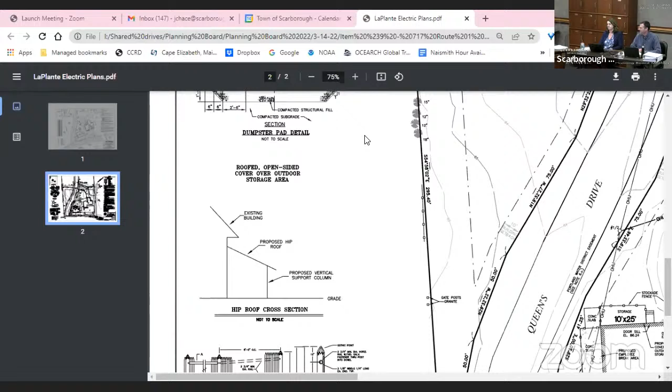Absolutely. The applicant did provide a proposal. Staff identified a series of issues to be resolved, and I think the applicant - I thought I even heard in their presentation - understood they have a little more work to do. I think the applicant made it very clear they're going to make some changes to the plan. So my suggestion to the board would be to table this item until the applicant makes those changes and comes back. I've also heard the board ask for a couple of additional items - clarity on what the shed roofs are going to look like, beyond the drawings we have here. So it seems like this one's ripe for another review, in my estimation, but certainly at the board's discretion.

I agree with the statement that Jay made, and I think this is certainly a step in the right direction.

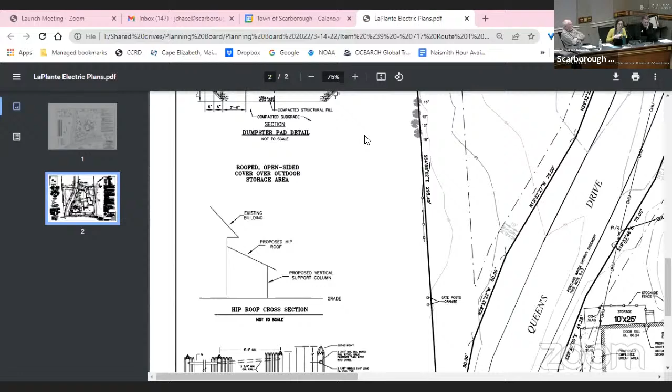I think if you could include some more information in the next submission, things we've already talked about, some landscaping details, a rendering or a photo, like a before and after kind of photo of what the back of this site, what your neighbors may come to expect here.

And if that's included in your packet, that becomes publicly available. So the public and the other neighbors here in theory would have the opportunity to see that ahead of time.

And perhaps tailor any comments they may have publicly at the next meeting. Yes, this is a treatment that's acceptable to us, or kind of to Karen's point, add some other feedback on things like that. So not only would additional information be helpful to us, there may be a benefit to the neighbors as well.

Do you have a comment? Just given that the staff comments were extraneous to the roof issue, it's really the covering of the outdoor storage areas. And Madam Chair, I think you had the question about what's there right now.

The back corner of the building, the northerly corner, there's a fenced-in graveled storage area already there, no roof on it. The two we're proposing immediately behind the building, there's nothing there right now, just vegetated. So we're moving everything from the side of the building to the back, the small outdoor storage areas, and just covering them with a single hip roof, a shed roof.